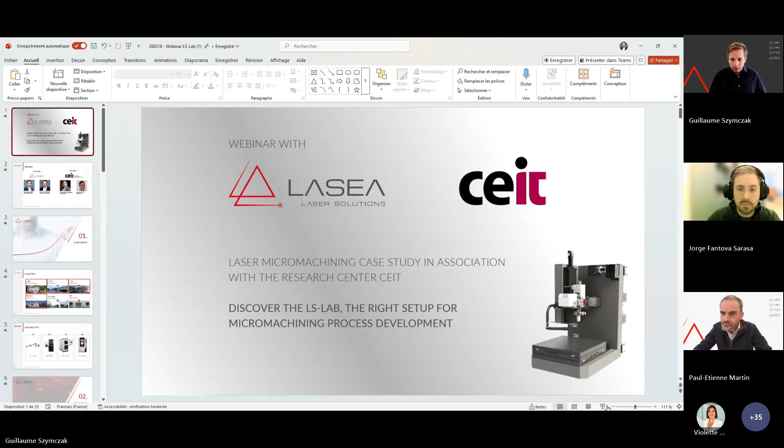So let's wait a bit. I can start to share my screen in order to be ready in a minute to start this webinar from LASEA in partnership with CEIT. Oh, I guess you can see my full screen now. Let's wait a bit. People are still coming. So

Here we go. So I propose to start this webinar organized by LASEA in partnership with CEIT, where we will present you the LS Lab system. That is, from our perspective, the right system for micromachining process development.

So from our side, LASEA side, it will be a more technical presentation, and we'll let the floor to CEIT to present a case study, how in fact they use the LS Lab, and as a teaser also how they switched from the LS Lab system to a machine still from LASEA.

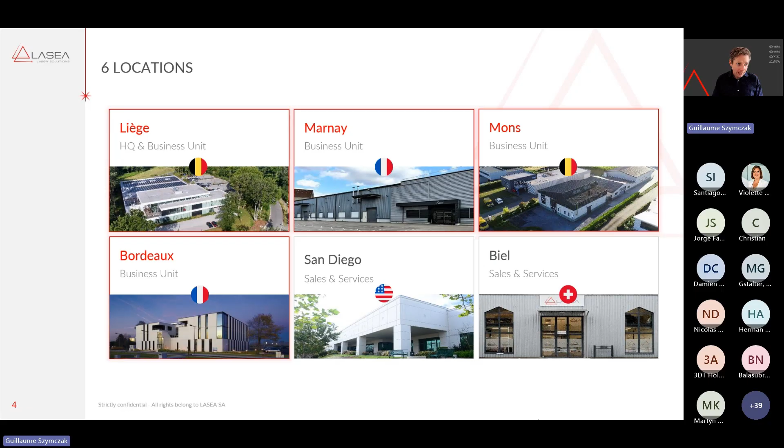So, as I mentioned, we develop and build micro machining machines. I will start to quickly introduce our headquarters, represented by the last platform that we developed, here on the right of the screen, the NEO system. So in this facility, from my point of view and perspective, I'm always impressed when I go there, because we definitely push the boundary of what you can do in terms of micro machining, and the DNA of the facility in Liège is to make very high precision machines.

For some applications, we are nearly talking about precision around plus minus 1 micron. That is crazy, with also a high level of automation. And these machines are mainly equipped with femtosecond lasers. We have inside the group also Laser Cheval, maybe a company that you know. They were created a long time ago, 50 years ago, and today they make off-the-shelf standard products, using either femtosecond laser or QCW, a nanosecond laser, for marking and engraving, but also welding applications.

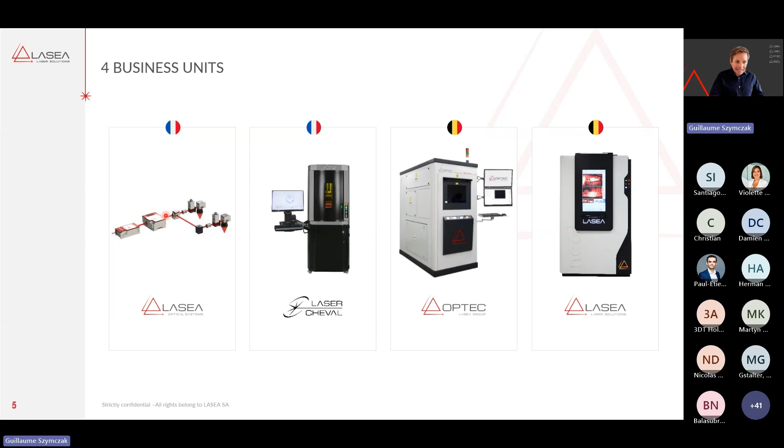And last but not least, the facility in France, represented by Paul Etienne and myself today, where we develop and build optical modules for the group, but also LS Lab, the topic of today.

And so when we talk about micro machining, this is an overview of all the applications that we address with these machines. So it can be marking, engraving, texturing, thin film removal, selective ablation, wire stripping, welding. One of our latest developments is linked to turning applications. And we have all these cutting and drilling applications where, thanks to our precision module, we are able to have 0-degree taper. So for the French speakers, I definitely recommend a webinar that we did with one of our customers called Vulcam around 1 month ago or a bit more. It's available on YouTube, and we explain how we use this machine and also how we can combine different applications with only one machine.

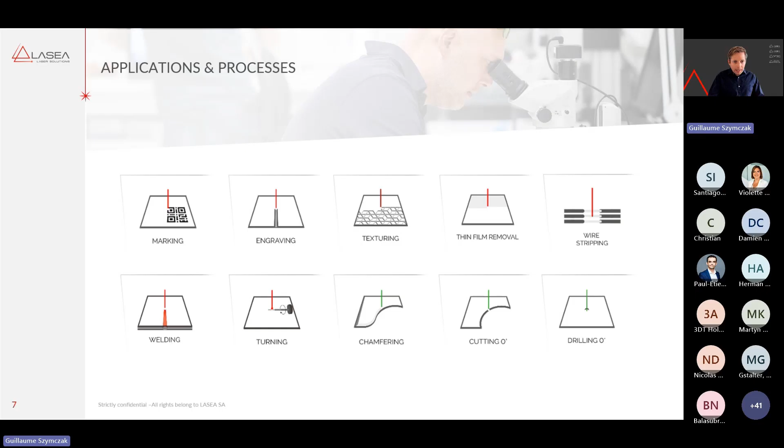And so that's for the applications. For the market, there are 3 main markets that we target today with this system: luxury, electronics, and medtech. And all these markets are for us key. For us, there's also research, let's call it a market. It's all the university R&D centers, but we also include from time to time the R&D departments of companies where we deliver systems and where today the LS Lab makes the differentiation.

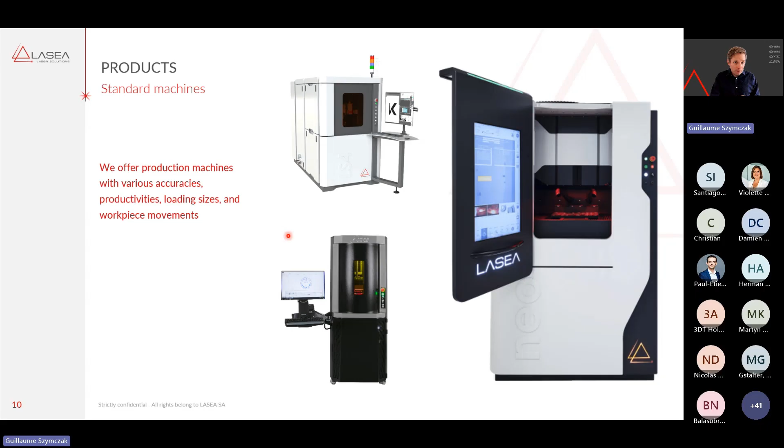So to answer this question, why we developed the LS Lab and what you can do with this system, I would like briefly to go back to our portfolio, just to understand the process that ends up with the LS Lab portfolio. So we have, again, quite standard products designed for production, where we can achieve various accuracy and productivity levels, and treat different sizes of material. We can, of course, connect them to external systems to bring more automation. So here are a few examples, but we have a large range of solutions if you want to bring autonomy to your machine. So it can be, for example, roll to roll, like you can see at the top, or a stacker, one of the latest developments from Laser Cheval that gives overnight shift autonomy or weekend autonomy to the machine. Or we can also integrate a robot arm into our system.

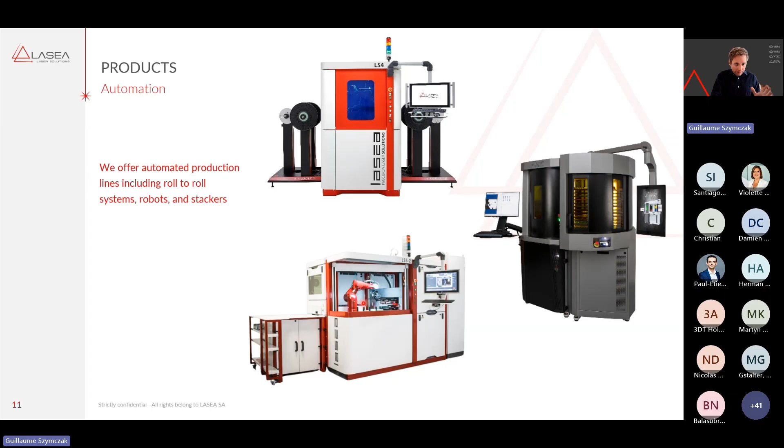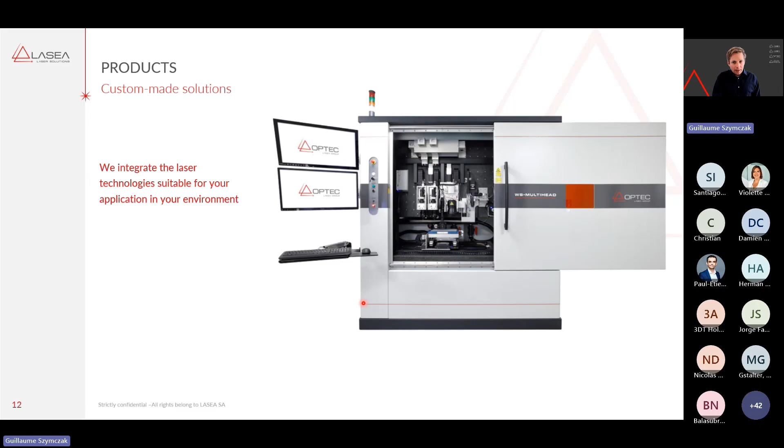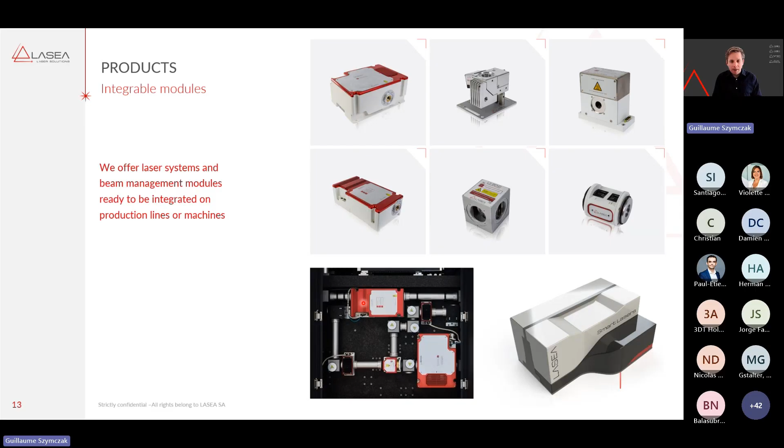So production machines, and also very custom machines, as I mentioned, with OPTEC, that can answer a specific environment from a customer. On top of that, we have all the modules that we use in our systems for beam management. We are also able to build ready-to-integrate systems for production lines or machines that we use inside the LASEA group, but we can also sell outside the group. So this is the picture of our portfolio. And again, our machines are designed for productivity, repeatability, quality, and to meet high volume production.

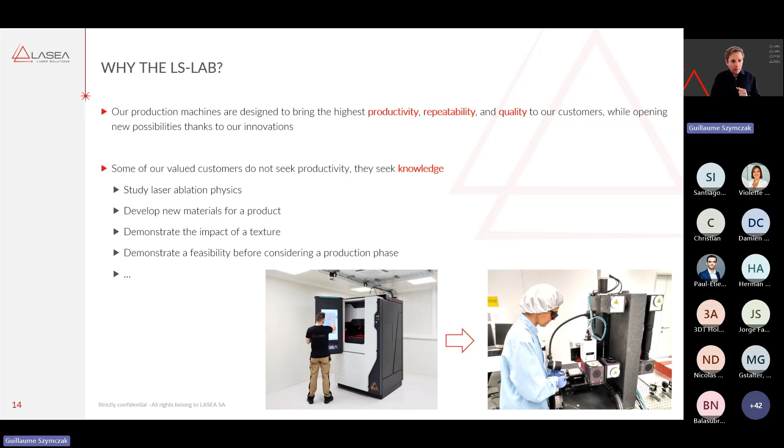But nearly 10 years ago, we had a customer, a lab called SAIT, who came to us and said, we would like to have your system, but we don't care about productivity. What we seek is knowledge. We would like to use your system to study the interaction between the beam and the material, to work on new materials, to demonstrate laser processing at a really early stage. But outside of production, we want everything you have behind your machine, meaning the repeatability, the quality and stability that you offer with the system. And this is where we ended up with the LS Lab platform. So definitely a solution made for engineers and scientists, that is in the end about knowledge.

You can have access to a lot of laser parameters. You also have access to different configurations. And the LS Lab is definitely built to also match the rest of our portfolio. It means that, for example, on some machines we have a motorized beam expander that allows you to have different spot sizes or different tools, depending on your point of view. It's a function that you also find in the LS Lab. Same for the precision module.

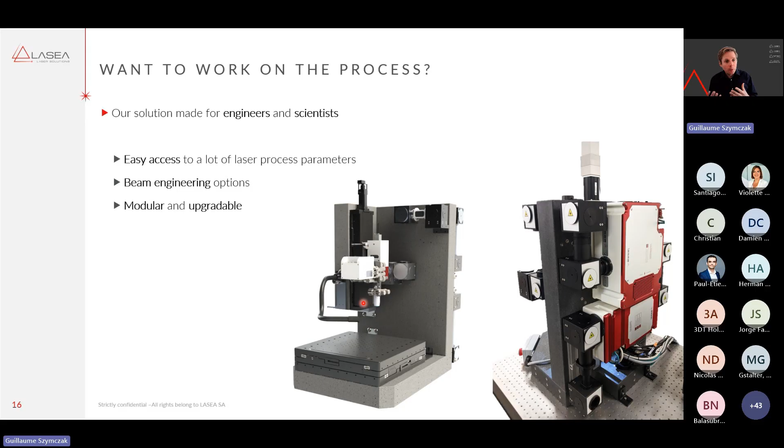If you want to develop or test processes that require 0 degree conicity, we can bring the LS process or precision module into this lab. And again, as it's something made for people who want to do development, we designed the LS Lab to be upgradable and modular. And so today we end up with 3 different products inside this product line. LS Lab Access is definitely the entry point of the LS Lab portfolio.

And as you are part of this webinar, you have a kind of exclusivity today with the picture, because at the beginning we developed the LS Lab Access as a fully manual system. And a week ago, our engineers just finalized the design and integration of motorized axes that don't bring precision, just positioning, and definitely make the life of the user easier instead of using this manual stage. If you follow us, we'll make a communication soon around this upgrade of the LS Lab.

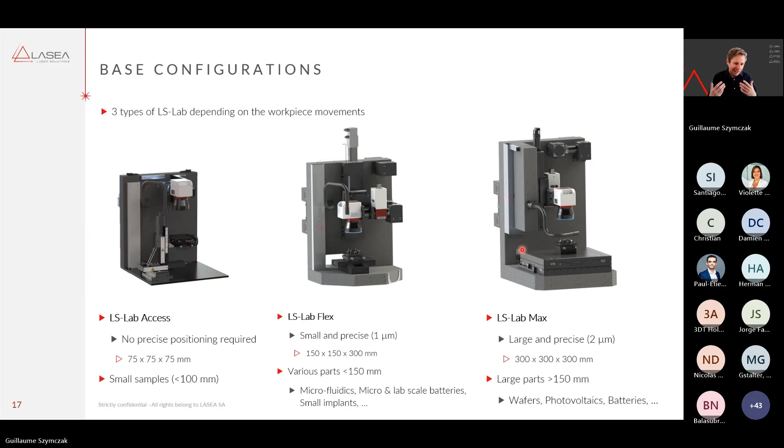And the main 2 that we have in our portfolio are the LS Lab Flex and the LS Lab Max. The key difference is the stages that you have, so at the end of the day, the sample that you can load into this system. The Flex is equipped with XY stages of 150 by 150, and the Max is 300 by 300. And each time the DNA is to bring a high level of precision, but also stability and repeatability, that at the end is a mirror of what you can have later on a production machine.

So definitely this tool is quite good for process development and prototyping. Here, what you can see is the open system. You will see just after in my presentation that we can put a safety enclosure to be compliant with the machine regulations, so the class 1 level. That means you don't need any goggles to use this system. And also at the back, what you cannot see is the laser.

So today we can propose a femtosecond laser from 6 watt to 40 watt as standard, with green, infrared, and UV. But if you already have a laser in your facility or in your lab, or if you want to use another laser like a picosecond laser or even a nano, we can definitely evaluate your request and answer your needs.

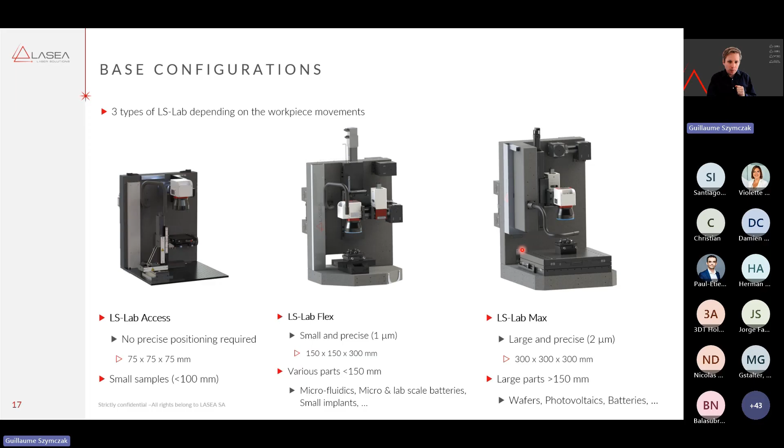And today we have a lot of PhD students who did their thesis on this kind of equipment. The key element is that if there is a new request for the study, we can easily upgrade the system, or we can also add external modules. I'm thinking, for example, if you are looking for a top hat system or DOE or whatever, it's something that we can definitely integrate into this LS Lab.

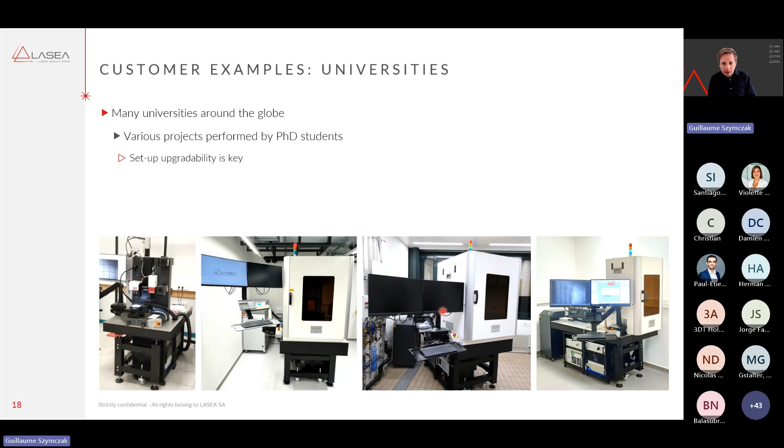So we used the system for a year, and then after a year he wanted to explore the UV wavelengths too. As everything was already ready and the system was designed to be upgraded, we added an extra station dedicated to UV, to give the possibility to develop with these wavelengths. Today this customer is nearly close to production and plans to move all the development to another machine.

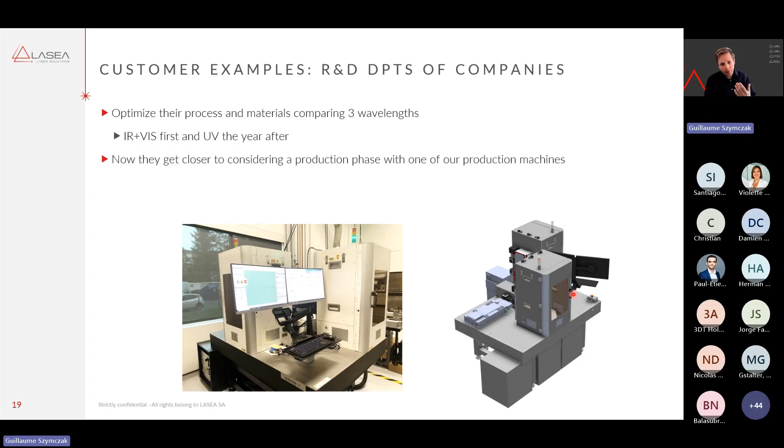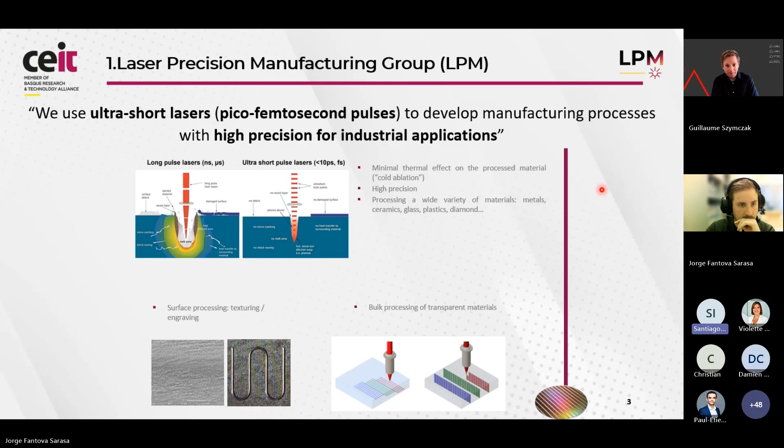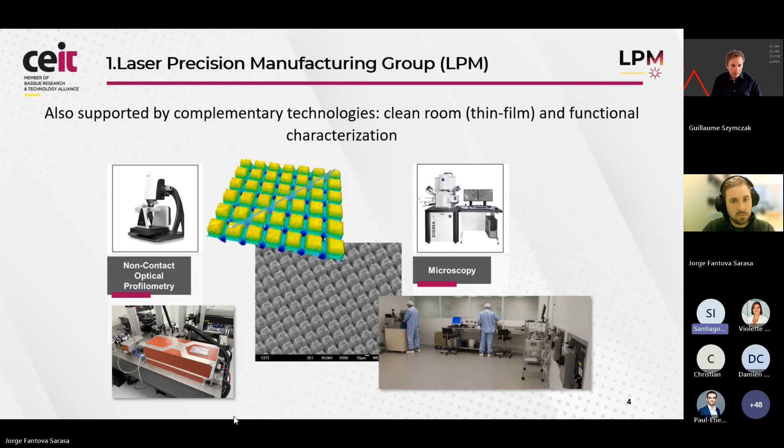And just to end this framework, I would say that now, after 6 years, a couple of years ago we purchased an LS4 Lab, an LS4 machine, industrial grade, full industrial grade machine. You can see it there. Both of them are in the clean room. So we can do laser processing plus microfabrication and material growth within the same lab, basically.

It's been a successful story in the sense that we got the LS Lab quite inexpensively as a first investment, and we could test it and see that it worked. Then our clients got more interested and wanted more parts, or larger parts, or some kind of industrial projects development, and we used the industrial grade LS4 machine for that. It's a great way to get into the technology with controlled risk.

So at the moment, we're using the LS Lab still when we need proof of concept, when we want fast arrangement of the optics or the stages or whatever. And then we use the LS4 more for pre-production and validation activities. All in all, it's very nice because the optics are compatible. It's not direct - it's never direct in optics to go from one setup to another - but it's not painful. So it's quite easy to get one proof of concept in the LS Lab and then implement it in the LS4 machine for industrial validation.

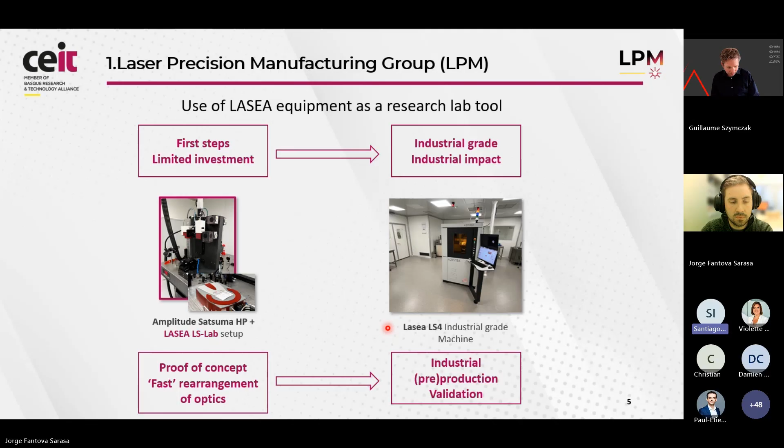Okay, I'm going to let you know, to give word to Jorge, so he can actually describe how we're using the LS Lab in our premises. So Jorge, you have the word, you have the floor.

Yeah, thank you Iago. So first, I would like to talk about how we implemented the LS Lab at our facilities here in San Sebastian. In this slide, I'm showing the LS Lab station implemented, as Iago mentioned, in our clean room facilities. It is mounted on a granite platform and comprises several modules, which are pointed here.

As we see in this diagram, we have first both a power and a beam size management module that is motorized with beam expansions of 2 to 8. Then we have a polarization module, which can be automated - in this case it was manual. And lastly, a processing module based on a Galvo scanner with a 100 millimeter F-theta lens for beam delivery and an XYZ stage precision system for sample positioning.

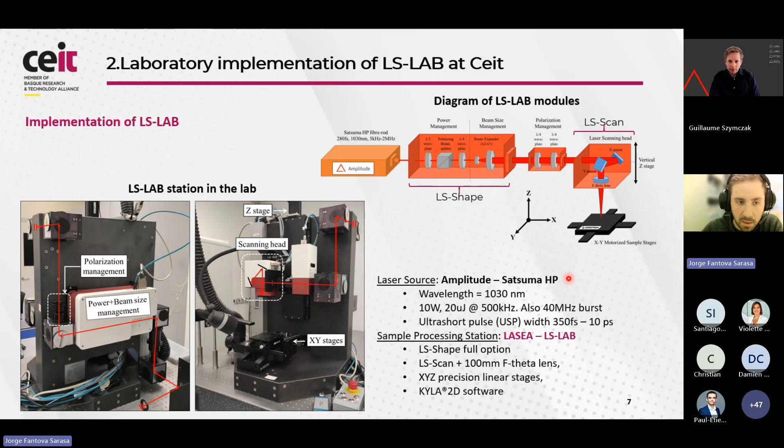In this setup, we are using an Amplitude Satsuma HP femtosecond laser source with a wavelength of 1030 nanometers and some burst capabilities in the megahertz range.

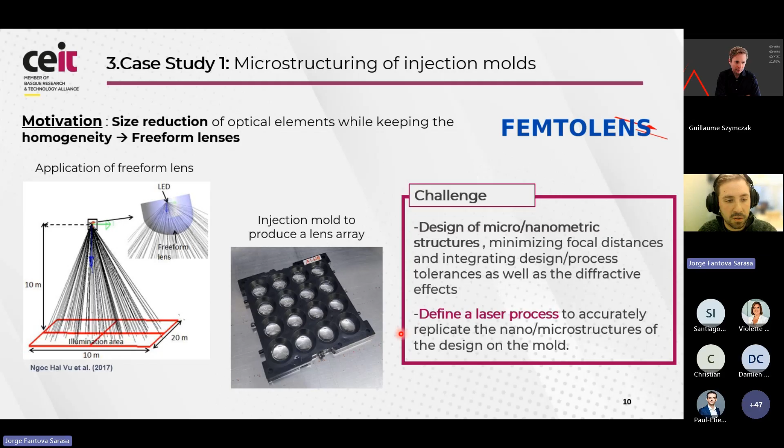So moving on to the 2 case studies that we have prepared for today. The first case study is about the microstructuring of injection molds with femtosecond lasers. The results are presented in the context of the FemtoLens European project, which was really focused on the production of freeform lenses for tailored lighting applications. From the different partners, in our case, the challenge was to define a laser process strategy to accurately replicate the features of the mold that we want to fabricate.

To achieve this, we followed a 2.5D laser micromachining strategy, which I will briefly review for those not familiar with it. Basically, we start from a target STL design that we point here. And what you have to do in order to do the micromachining is slice, let's say, from top to bottom, this 3D structure for the laser engraving. Each layer represents one laser pass, where we are doing ablation.

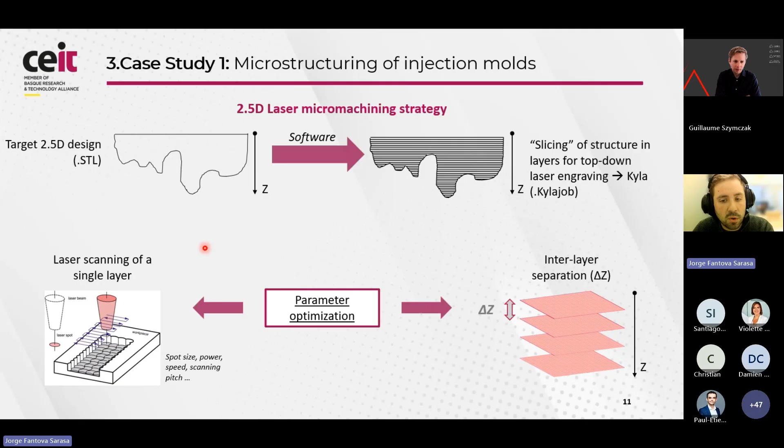And you have to know, in order to achieve a very smooth and accurate engraving, first you have to tune the laser parameters, such as the spot size, the power, etc., to achieve a homogeneous engraving of a single layer. And then you also have to optimize the separation in Z between each of the layers, where a bigger separation would mean a higher throughput, but less resolution. Generally, we are more interested in the resolution and in having a finer feature, so we tend to have as small as possible gap between the layers - to give you an idea, between 0.5 and 1 micrometer.

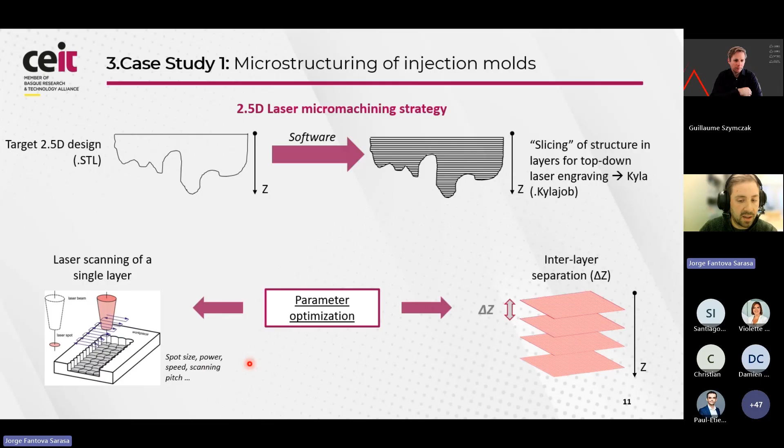And it is worth noting that both the slicing of the structures and also the modulation of the different parameters can be done through the LS Lab platform and the Kyla software that comes with it. So it's pretty handy.

So, jumping straight into the details, just to show some of the results. After optimization of the laser conditions, we fabricated several lenses, in this case on a stainless steel substrate.

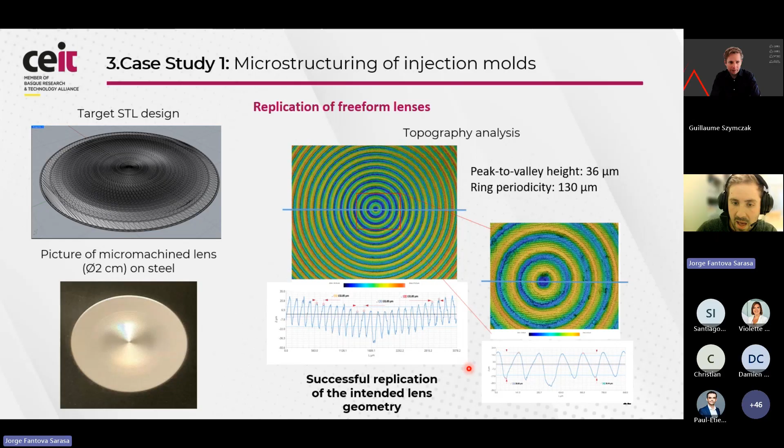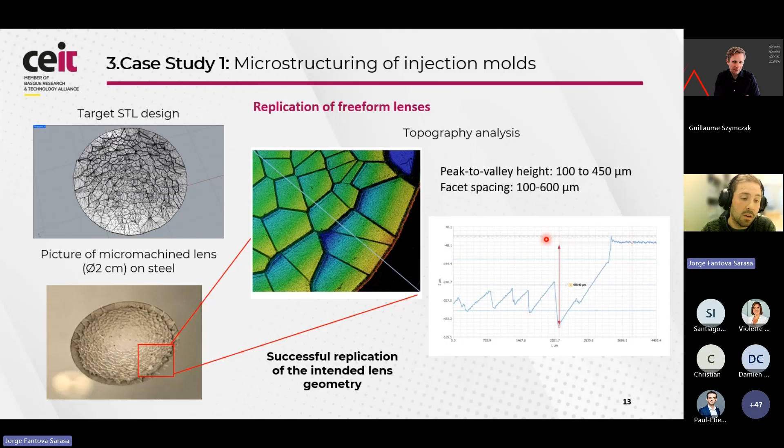Furthermore, in some cases, we also perform something very hot right now: laser polishing through femtosecond lasers. So after doing the micromachining of the lens, we did a kind of laser profiling, just following the contour of the lens. In this case, by using the megahertz burst, we were able to polish the lenses.

You can see here some of the results. Basically, we were able to achieve in this case a reduction of around 40% in the surface roughness, as you see here.

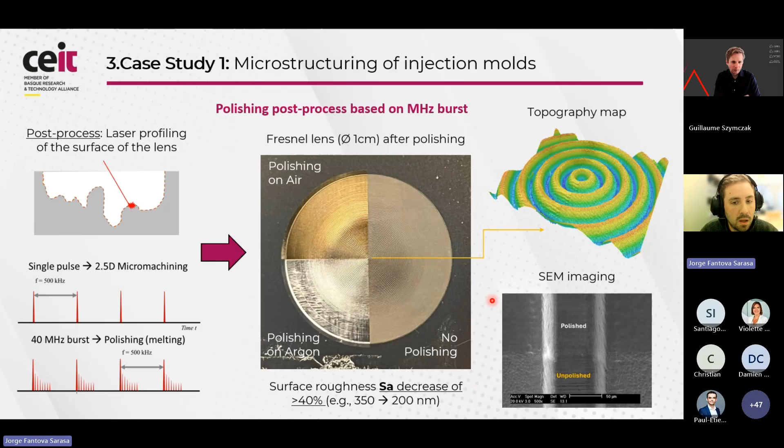Just to give you an idea of the second use case, one of the different operations you can do with the LSLab: the second is about the selective decoating and texturing of thin films. We want to show how, by using this ultra-short laser technology, we can do a very precise and selective decoating in a very straightforward manner. This has applications in industries such as luxury, lighting, and microelectronics.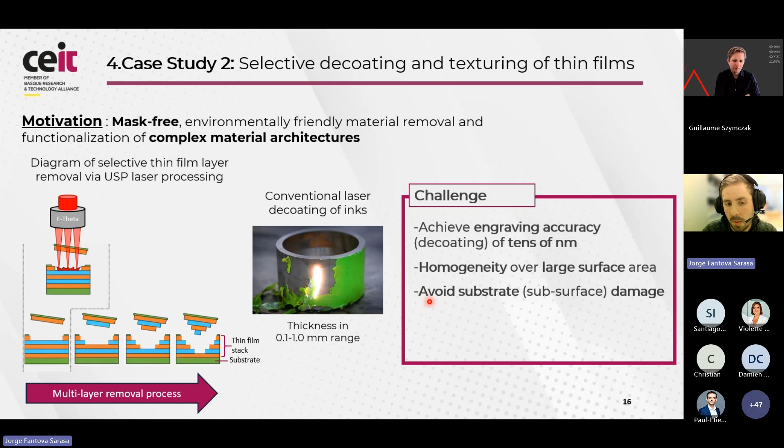The challenge here is basically to have a high enough engraving accuracy - we say in the order of tens of nanometers - and also to have it be homogeneous across the whole surface area, without any damage to the layers below. So I will show some examples.

In this first one, we show how, on the left, by tuning the pulse overlap, we achieve gradual light transmission by decoating step by step, let's say, the chromium coating on a glass substrate. You can also go to finer structures by tuning the power and beam size, achieving holes of 50 micrometers or lines of 10 micrometers or lower.

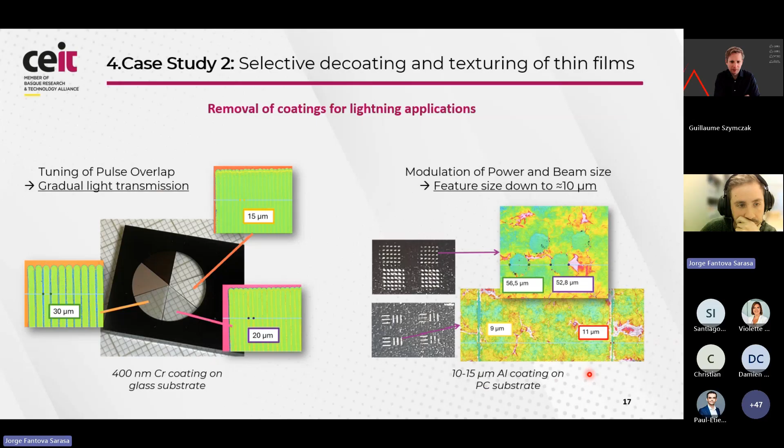In this case it was a much thicker aluminum coating. Another example that's very interesting for us, talking about the selectivity of the process, is that we can selectively decoat a multi-layer metallic stack. In this case it was for decorative purposes for the industry. We see here on the left a diagram of the look of the coating from the top, and the structure, a 3-layer structure of the coating.

And through this electron microscopy analysis, the imaging and the elemental analysis by EDX, in this case we achieved to decoat only the topmost layer, leaving the palladium and gold layers unaffected. But you can have a larger removal. In this case, we were able to remove the whole coating stack of 3 layers, starting from gold, and on the bottom was a nickel substrate.

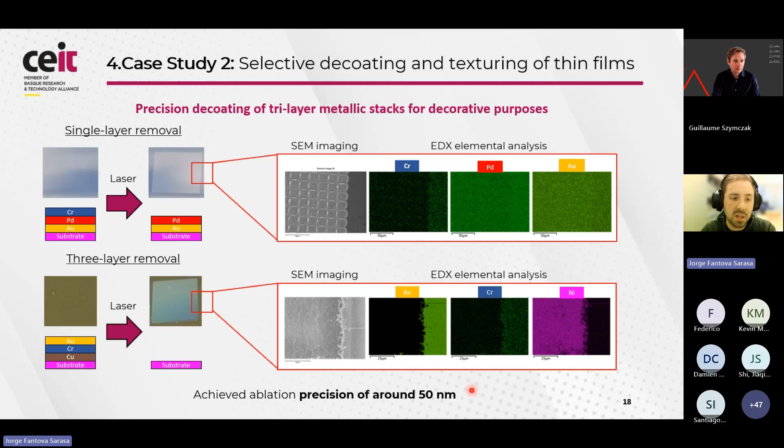And in this case, you see that the gold and the chromium have been eliminated, and therefore the nickel resurfaces or is revealed by the ablation, just giving off this bluish color. In this process, we achieved a precision of around 50 nanometers.

And lastly, linking with what Iago mentioned, it is very interesting to combine both the capabilities of thin film deposition and laser decoating or texturing. In Ceit, we can generate metal and oxide coatings with thicknesses from around 20 nanometers to a few micrometers, which can provide not only this very beautiful coloring that you see here, but also appropriately tune the optical properties of the surface of the substrate.

And furthermore, by combining these two, you can, for example, laser texture the substrate before the coating to provide some functionalization, for example to control wettability or to have some anti-counterfeiting features for some applications. In particular, these samples that you see here were laser textured, and then we coated them with PVD for decorative purposes.

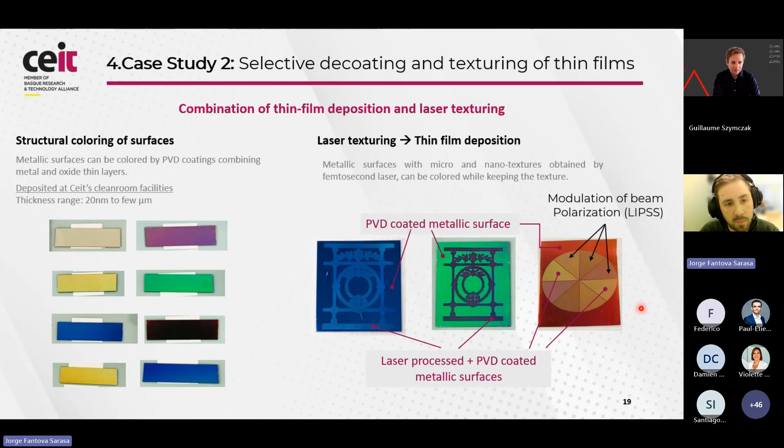Just to close the presentation, to remind what we have seen: in the beginning, the LS Lab was a very great addition to the lab and is still being used. But as the technology moves forward and more industries are thinking about integrating these technologies into their production lines, we have seen that it would be very beneficial to give them more reliability and have it more industry integrated, easier.

So that is why we purchased the LS4, and we think systems like this would be very beneficial not only for industry, but for research centers such as ours, to get more customers due to the higher throughput and productivity, the advanced process monitoring, and the possibility to process complex parts that you can do with this kind of system.

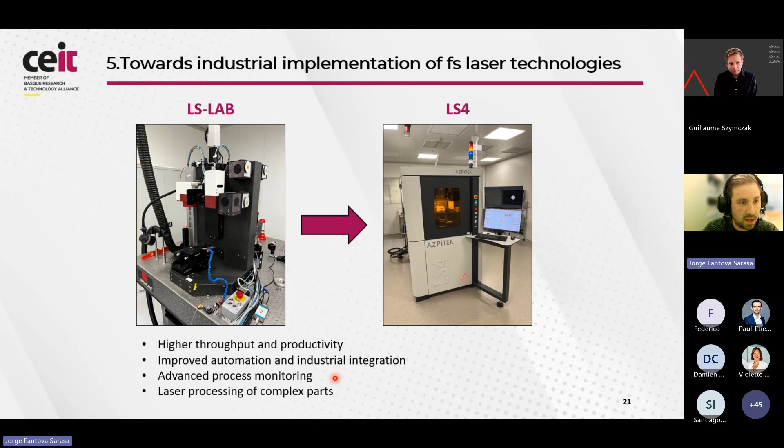Thank you very much, Jorge and Iago, for this very nice presentation of how to use the LS Lab and what the LS Lab can bring. I just want to join the conclusion of Jorge: at the beginning they got the request, I don't want this machine, I want the LS Lab. But today the request is the opposite, so they develop everything on the LS Lab and then move it into the machine.